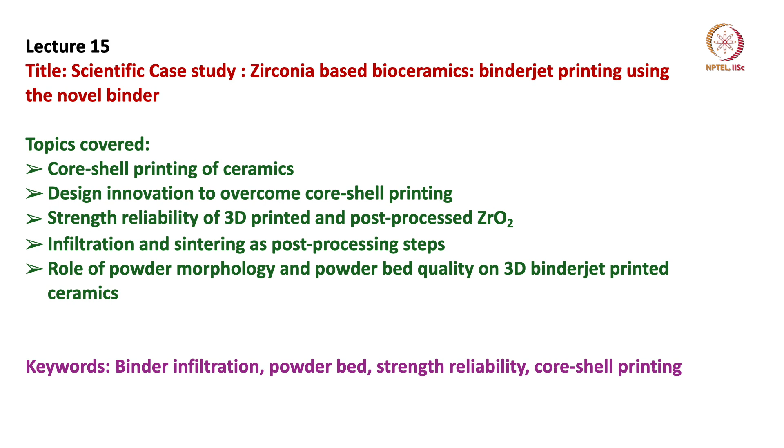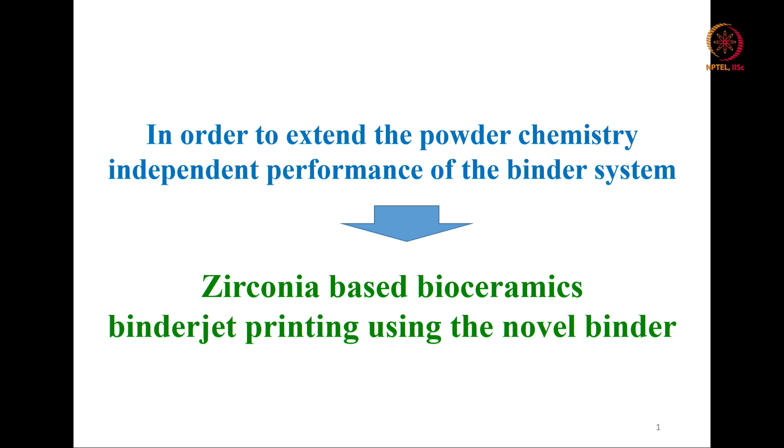So, in the last lecture we have seen how the in situ polymerizable ink was used to binder jet 3D print Ti6Al4V materials. We wanted to explore whether a similar ink formulation can be equally effective for binder jet 3D printing of ceramic based materials. One of the ceramics our research group has investigated in the past, and that I personally investigated during my PhD thesis, is zirconia based ceramics. So our aim was to see whether zirconia can be 3D printed using that in situ polymerizable ink.

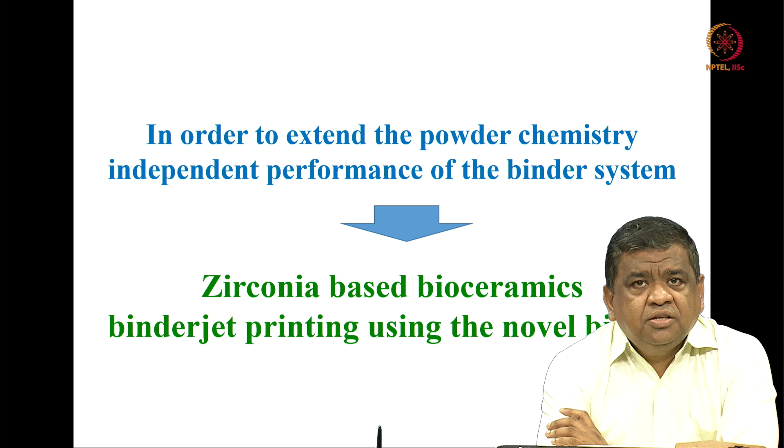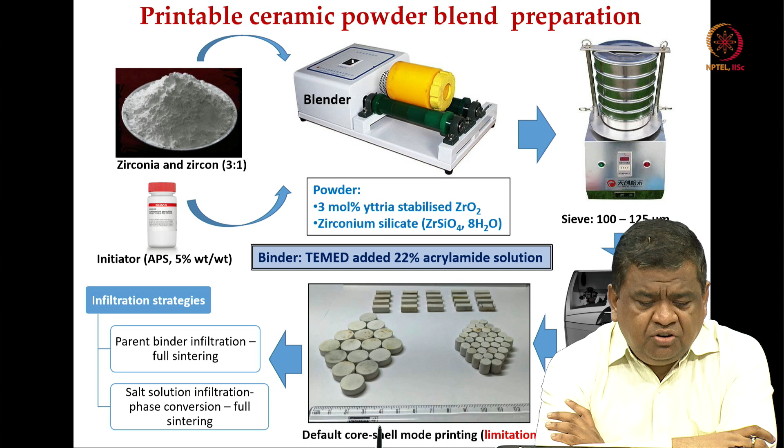What we have done is we initially started with zirconia itself and mixed it with an initiator, the same way we did for Ti6Al4V. The initiator concentration was varied, the powders were blended, sieved, and then 3D printed. But we did not get appreciable strength properties, and there was significant porosity in these materials. We could not control or reduce the porosity.

Subsequently, we developed a strategy to mix zirconia and zircon. Zircon is essentially zirconium silicate, ZrSiO4 with 8H2O, hydrated zirconium silicate, and for zirconia we used 3 mole percent yttria stabilized zirconia. If we mix in a 3:1 ratio with the initiator, then sieve to 100-125 micron, then 3D print, we found a core shell mode printing, which is the typical characteristic of binder jet 3D printing.

We found that we could print it, and it has strength properties, but the strength is not very high. In this particular case, we used the binder as TEMED added to a 22% acrylamide solution, the same one you have seen in the last lectures during the Ti6Al4V printing.

Thereafter, as a post binder jet 3D printing treatment, we used infiltration strategies. What is this infiltration? The same binder used at the binder jet 3D printing stage, we try to infiltrate into the 3D printed structure, followed by sintering. Another approach we used is salt solution infiltration, zirconium silicate salt solution infiltrated into the 3D printed structure, which then goes to full phase conversion during the sintering process.

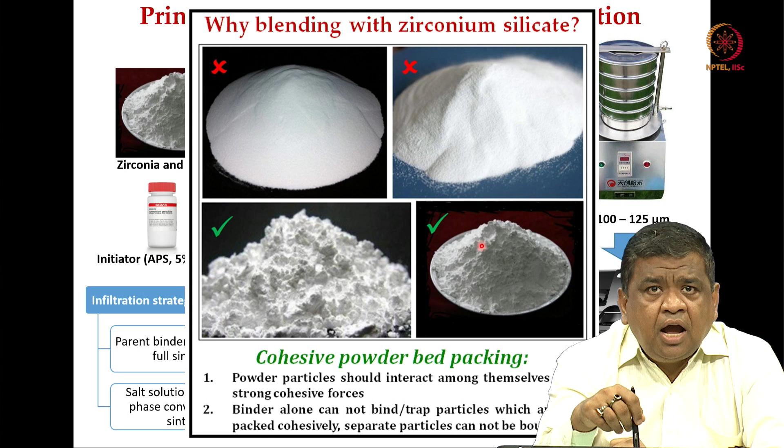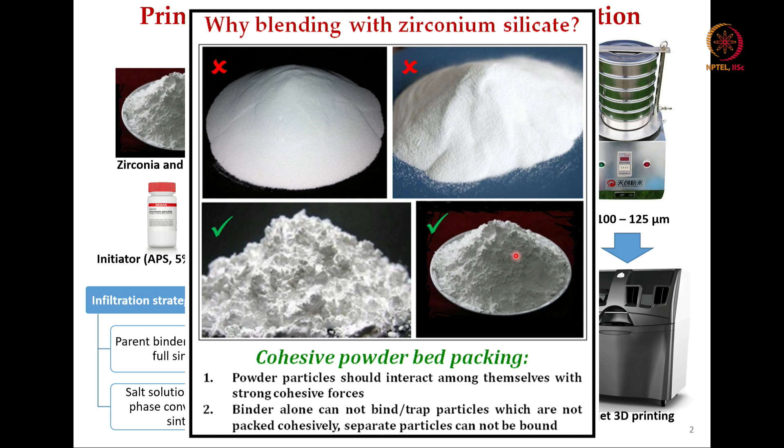However, if the powder is more cohesive, it should interact with itself through strong cohesive forces, because binder alone cannot bind or trap particles that are not packed cohesively. These kinds of powders are much better, as I am showing with the laser pointer. So we selected commercial sources that can provide this kind of cohesive powder and utilized that in the binder jet 3D printing of zirconia powder. This is a little busy slide.

Let me go through it slowly. This is the bioceramics modification strategies. The first generation strategy is essentially partial and controlled humidification for cohesive bed packing. What are the benefits? When the powder is partially moist, this core shell effect is minimal, and some of the powder packs more cohesively than the unhumidified powder. However, the shelf life of the APS initiator is very short, and macroporous islands are formed.

The second generation modification is metal silicate blending corresponding to the parent bioceramic chemistry. If you go back to this, zirconium silicate ZrSiO4 with 8H2O is blended in, and there is no APS degradation, with good cohesive bed packing observed.

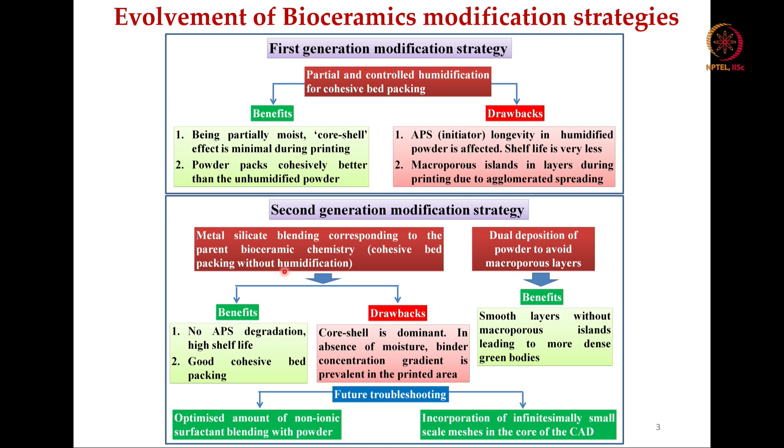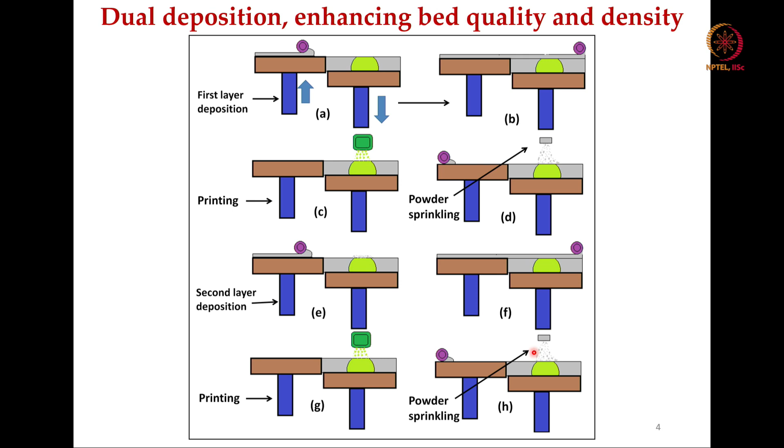Powder bed quality is very important in contributing to good properties of the 3D binder jet printed construct. If we revisit the core-shell methodology, the core is essentially the region where there is lower saturation, and the shell is the region with higher saturation. That is very characteristic of the conventional binder jet 3D printing process.

In core shell printing, saturation essentially is the ratio of the volume of ink that is required in reality to the ideal condition. That ratio is the saturation.

This is a drop on demand approach that we have been discussing for the last few lectures, and this is the 3D binder jet printing with acrylic binder that I would like to remind you of.

With this machine's default core-shell printing, one has to bypass it; otherwise we found there is no way to improve the quality and properties of the as-printed constructs, particularly in the case of zirconia.

A large number of cylindrical and rectangular cross-section samples were binder jet 3D printed and sintered, and thereafter fractured - cylindrical cross-section samples under compression, whereas rectangular cross-section samples were fractured under 3-point bending configuration.

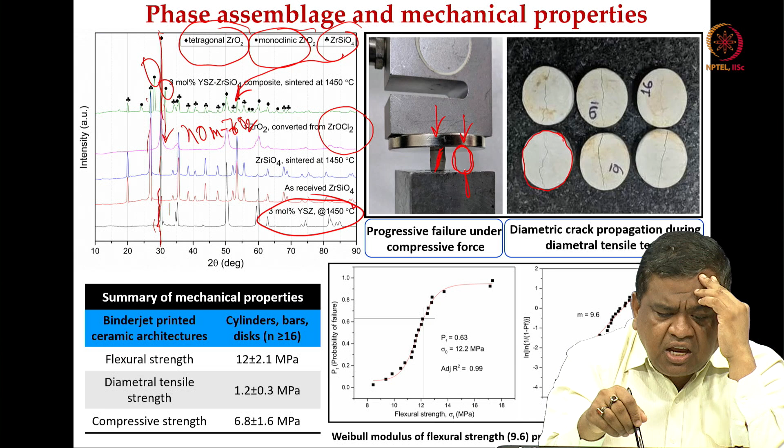Diametral compression test essentially means you take disc-shaped samples and put them under compression. If you know the mechanics of materials, you will realize that although an actual compression load is being used, the disc samples essentially experience primarily a tensile stress field. So this is one of the ways for ceramic materials to measure tensile strength: you take the diametral compression samples, put them under compression, and essentially measure the tensile strength.

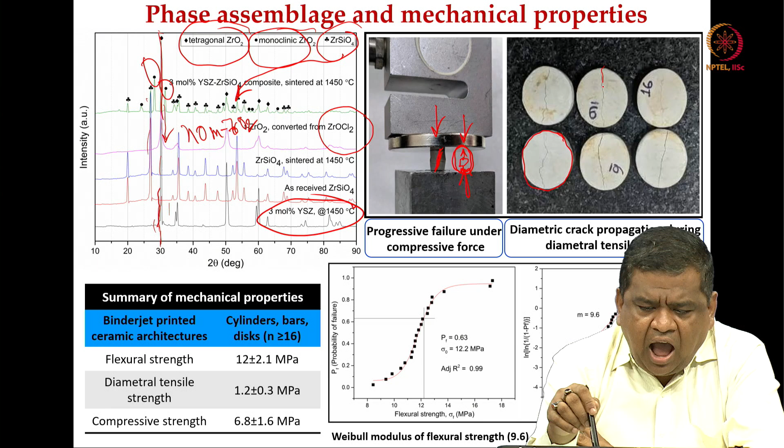The reliability of the test results has to be validated by showing evidence where you can clearly see the diametral compression test cracks propagate along the diameter. If the crack propagates randomly, as in this drawing, that is not good. These kinds of evidences, if seen after fracture, indicate the results will not give you reliable tensile strength from the diametral compression test. The ideal evidence is crack propagation along the diameter.

So what is the tensile strength being measured? It is very low, about 1 MPa, because it is a highly porous structure. Compression strength is around 7 megapascal, and flexural strength is around 12 megapascal, for n greater than 16 - meaning more than 16 samples were used for these measurements.

As I mentioned, and as you would realize by now, this 3D binder jet printed zirconia also has a lot of porosity. So this kind of porous binder jet 3D printed structure should also behave in a more brittle manner in this particular case.

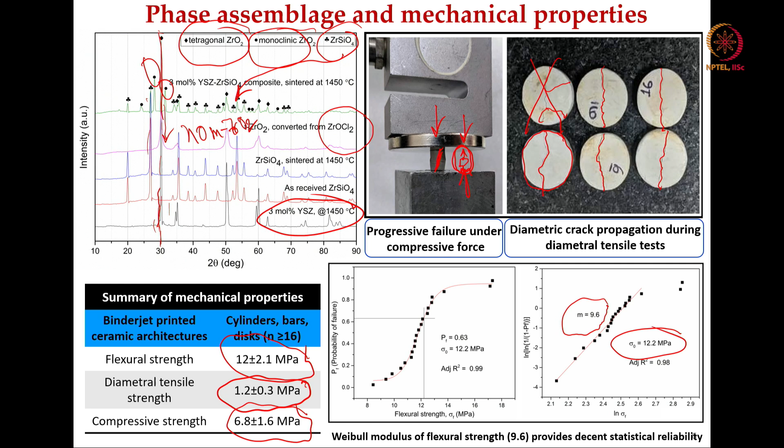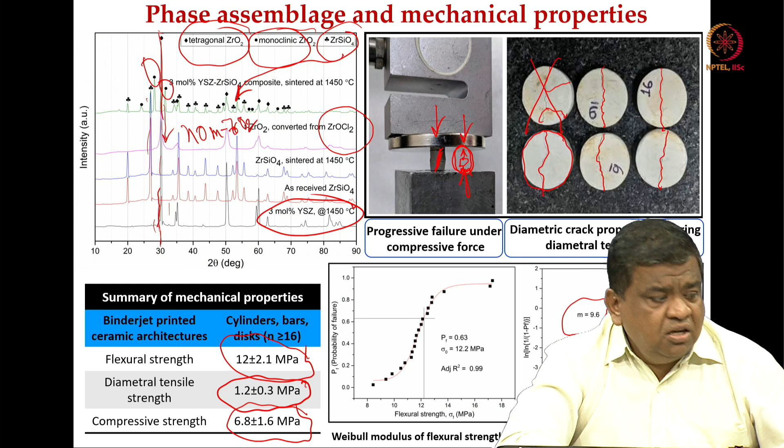However, their mean strength is fairly low, around 12.2 megapascal. So we consistently use this weakest link fracture statistics for any of the 3D printed structures, whether metallic or ceramic samples, primarily because of the good amount of porosity in the 3D printed structure.

The message in the center of this slide is about the total binder formulation: you mix the initiator with the powder, then use the monomer solution together with the accelerator dissolved in deionized water, and allow this in-situ polymerization to take place during the binder jet 3D printing. This approach was also efficient in binder jet 3D printing of bioceramic materials.

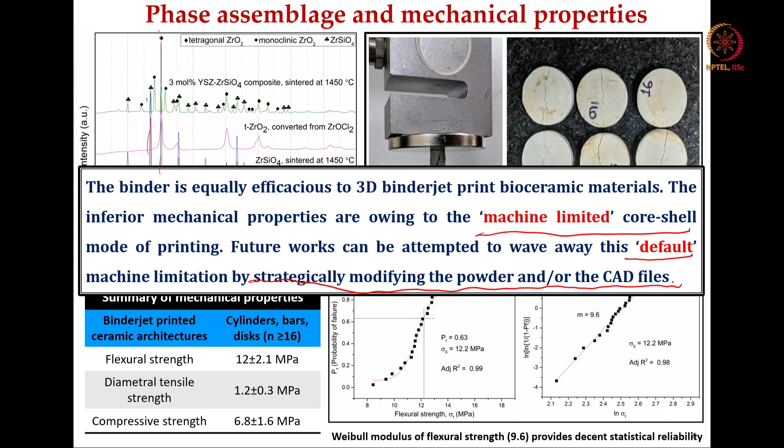However, mechanical properties remain inferior, due to machine limitations - it is the machine-limited core-shell kind of printing. So we need to move away from this default machine setting by strategically modifying the powder or the CAD files. There are two approaches to avoid this.

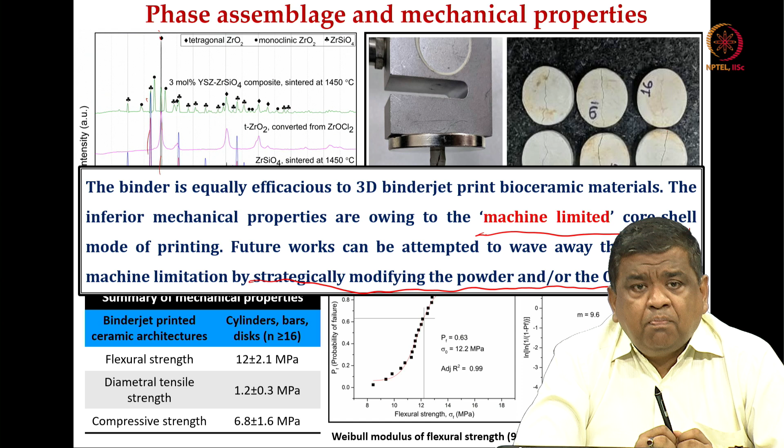One is the powder-based approach, and another is the modification of your CAD files, which you prepare using SolidWorks. For powder-based modification processes, as I discussed a few slides back, there can be two approaches: one is the infiltration of the same binder solution,

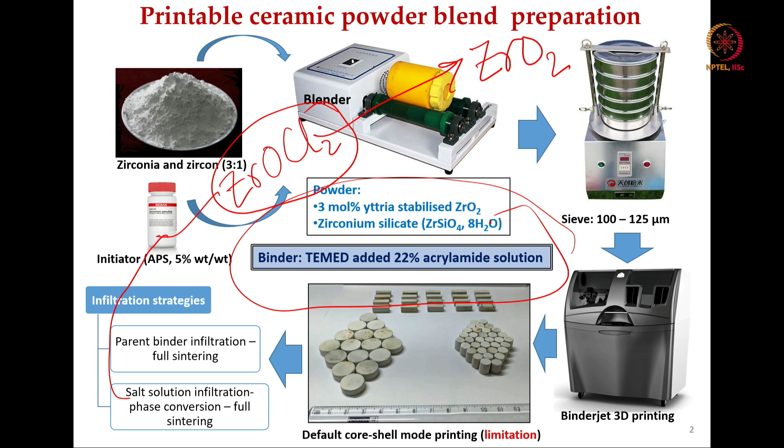or a salt solution - the zirconium oxychloride solution I mentioned earlier. When you infiltrate zirconium oxychloride solution into the 3D printed construct and then sinter it, you allow the zirconium oxychloride based solution to be converted to zirconia. So you get the same zirconia, but using a precursor salt solution. These are two approaches in binder jet 3D printing, particularly when working with zirconia-based materials.

Let me show you the approaches we have used. First, if you use unstabilized zirconia, like 0 mole percent yttria, and infiltrate it into the zirconia powder bed, we have seen that this causes failure.

We have prepared a small experimental setup. You can see this binder jet 3D printed structure, this is the 3D printed sample. So you essentially evacuate the microporosities of the partially sintered scaffolds, and after that you put it there.

Then you actually add infiltration of saturated zirconium oxychloride solution into it. You immerse it and do the infiltration treatment after drying, then sinter it for zirconia conversion. So you have the as binder jet 3D printed particles, and these are the partially sintered particles.

After this, what do you expect? You expect that through this capillarity region, zirconium oxychloride is essentially infiltrated into this capillary.

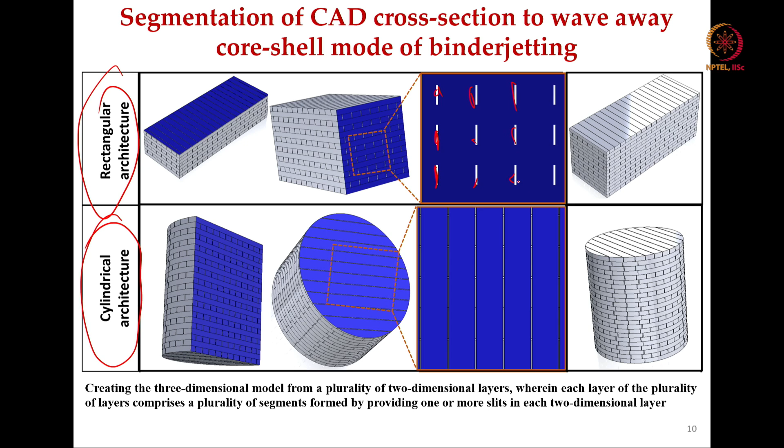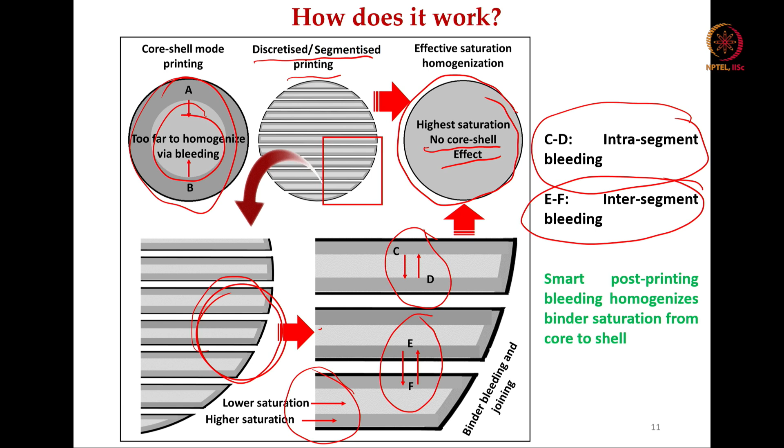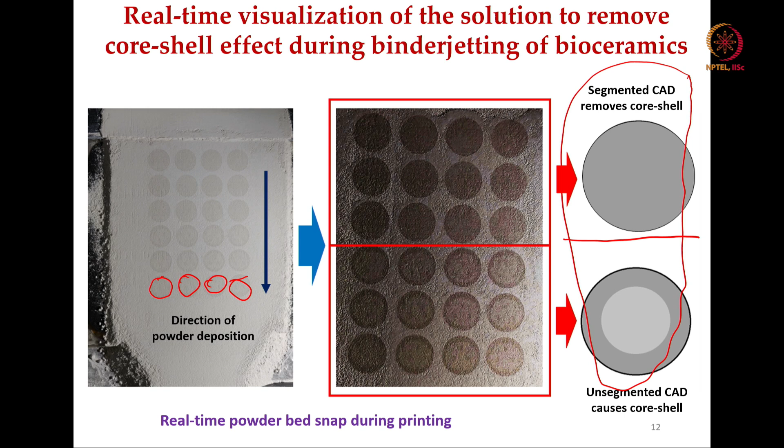This is segmented CAD, this is unsegmented CAD, which essentially causes the core shell effect. After that we used the dual deposition technique to enhance the packing powder bed quality and packing density.

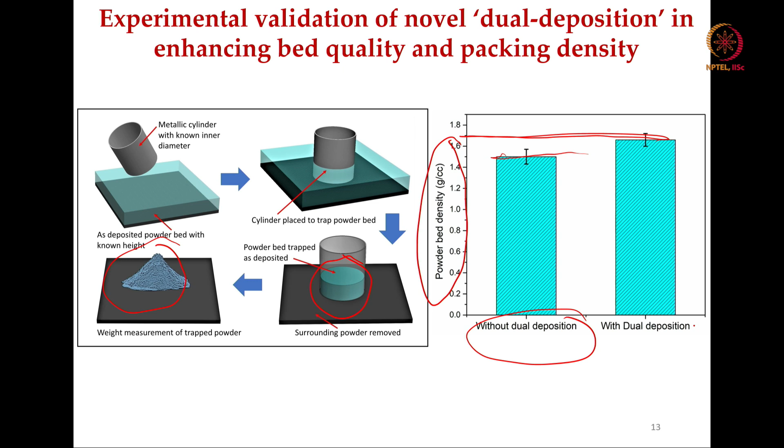So, what we have used is the modified infiltration method. In the modified infiltration method, we use zirconium oxychloride 8H2O together with yttrium nitrate 6H2O. So, this is the precursor solution.

In a vacuum, when we infiltrate in a drop by drop method in the pre-sintered green bodies—this means it can be also 3D binder jet printed materials—this is step 1.

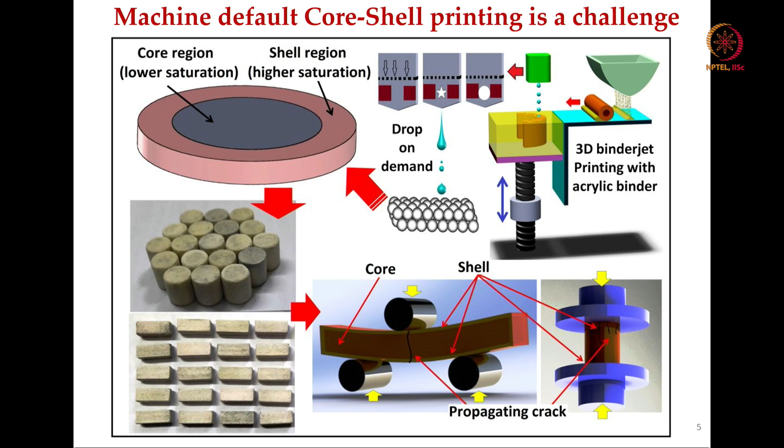In step 2, we actually add ammonia in a drop wise manner. Then step 3, you convert them at 600 degrees Celsius to yttrium stabilized zirconia, so that yttrium is also fused to the zirconium particles. If you repeat step 1, step 2 and step 3 a couple of times, then you stabilize this tetragonal zirconia or yttrium stabilized zirconia, and finally you do sintering at 1400 degrees Celsius for 5 hours.

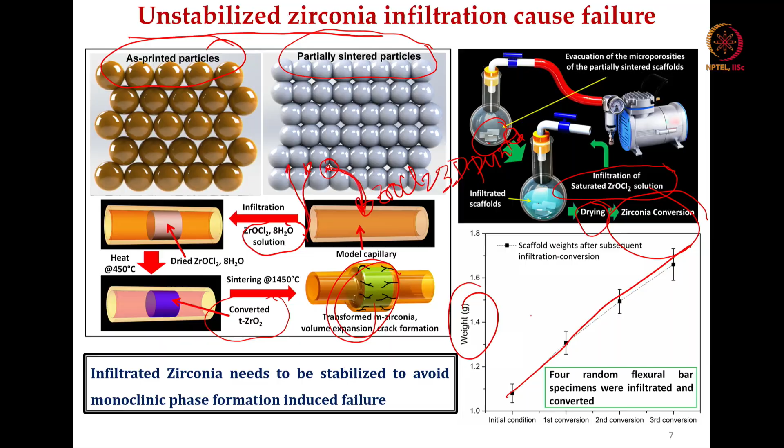This is in contrast to what you have seen in the last lecture, where one can use infiltration of the zirconium oxychloride solution itself. This zirconium oxychloride 8H2O solution will not give you stabilized zirconia, but more pure zirconia. Whenever the zirconia particles are unstabilized, this will certainly form monoclinic zirconia after the sintering process is over.

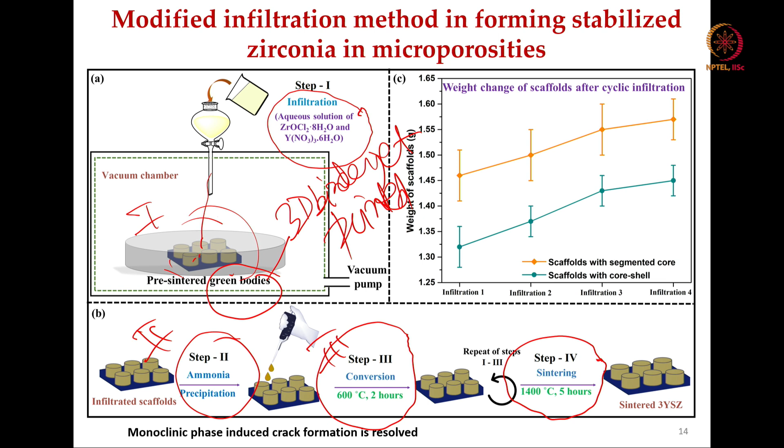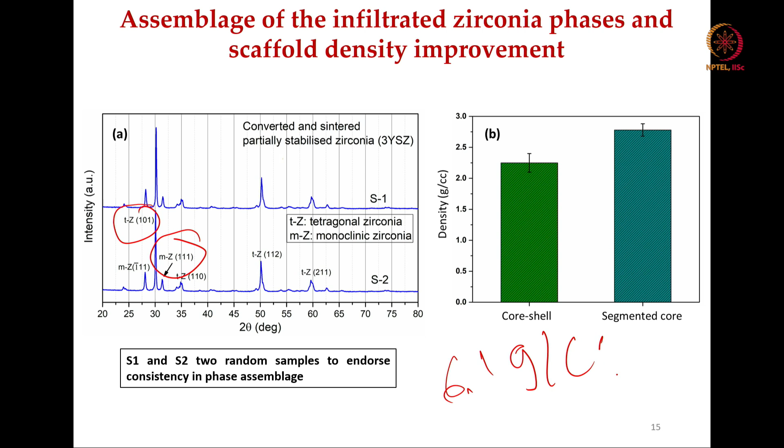Density wise it is fairly low, close to 3, and zirconia density, as you know, is 6.1 gram per cc. So it is much lower than that, almost like 50% porosity.

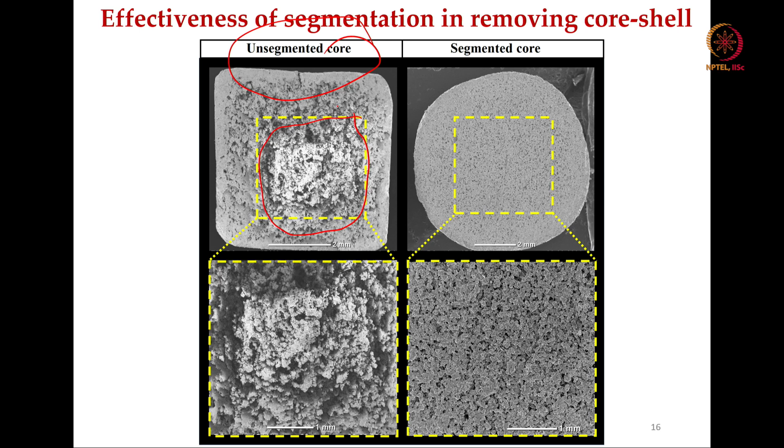One of the clear evidences we got from the segmentation or removing core shell is in the unsegmented core—you can see a highly porous core region. Now, when you have this segmented core, you do see microporosity, which I have repeatedly mentioned you cannot avoid in this case.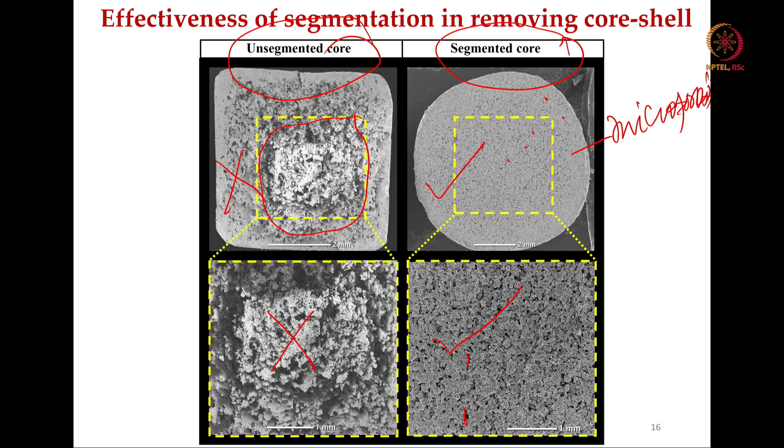This is a microporous region in case of the binder jet 3D printed structure, but we do not see any gradient in porosity, certainly not like that. This is not desirable, but it is still in the acceptable range of the microstructure that one would expect in the binder jet 3D printed structure.

I am not going into more details, but a similar methodology was used to measure the flexural strength and compressive strength. In the unsegmented core region, the flexural strength was 10 megapascal, increasing up to 12 or 12.5. Compression strength increased much more significantly—it was like 4 megapascal, going up to 14 megapascal, more than 3 times the compression strength after the CAD file based modifications were done.

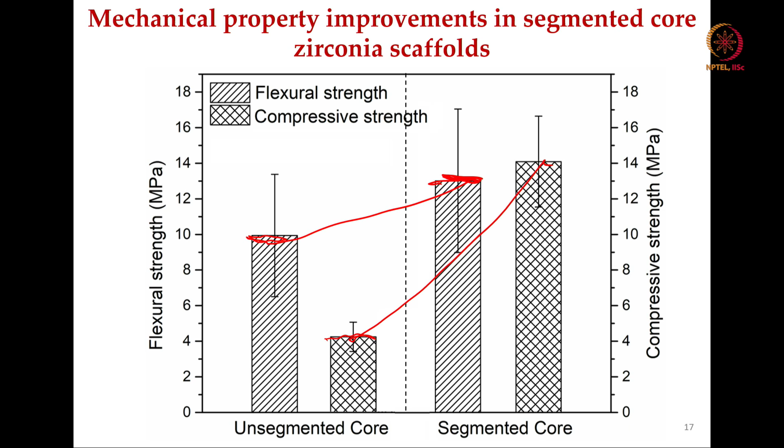So what you can see is there are CAD file based modifications, and also modification in the infiltration stage, both of which synergistically impact and improve the strength properties of the zirconia.

Now, what about this Weibull modulus or strength reliability? We have done a sufficient number of samples, loaded in flexure and also under uniaxial compression. In case of the core shell, you can see the Weibull modulus is around 3.2, it increases to 3.8 for the segmented core.

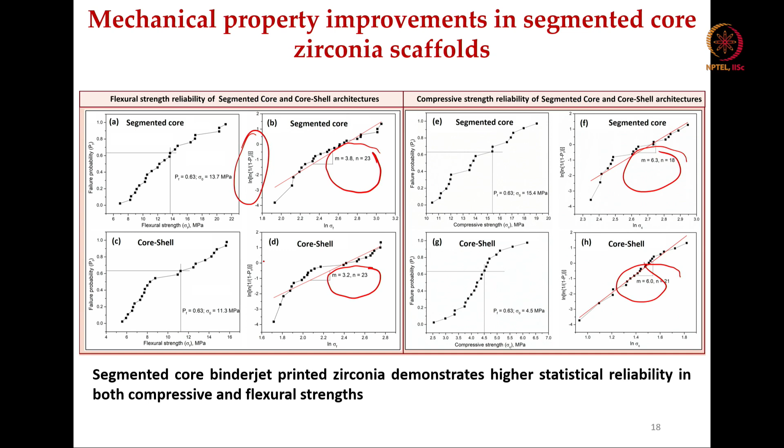For segmented core versus core shell architecture, in case of compression strength, the Weibull modulus was initially 6 and it increases to 6.3. On one side it is failure probability, on the other side it is the double logarithm of 1 by 1 minus Pf versus logarithm of fracture strength.

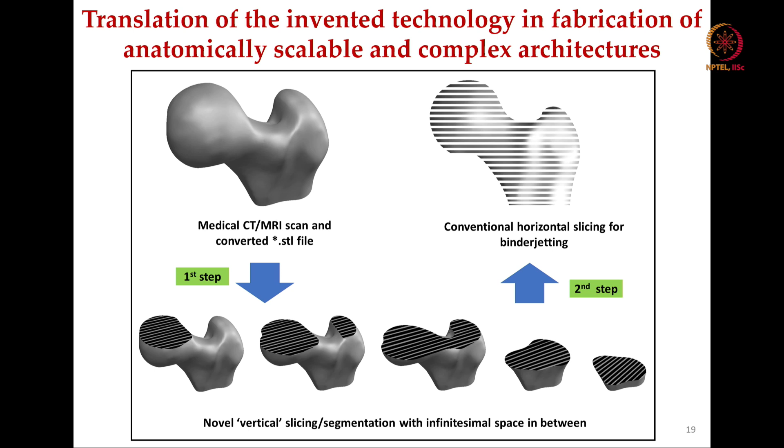So we actually try to see how this can be used for making some complex structures, let us say a femoral stem. We still have to go further to see how the large structure can be binder jet printed. This was published in Journal of European Ceramic Society as part of the PhD thesis of Srimanto at IISc.

So I will come back to you on more scientific case studies in the next lecture.